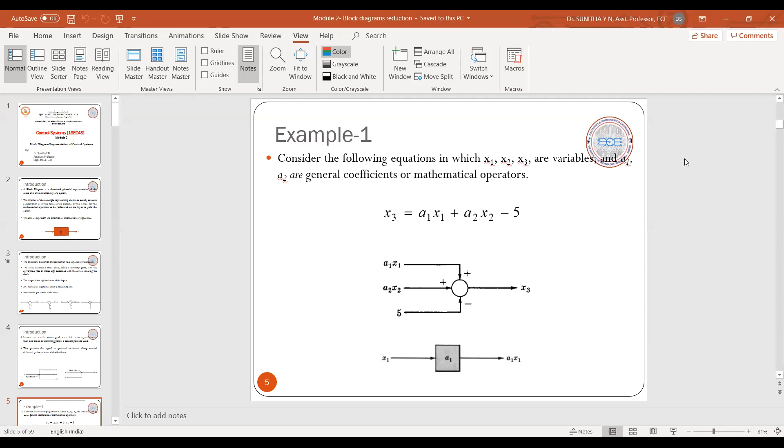Good morning, dear students. Let us start the second module, that is block diagram representation and signal flow graph. In this chapter, mainly we will be understanding how a control system is represented pictorially, and how a control system is represented graphically.

The block diagram is a pictorial representation of a control system, which will express a cause-effect relationship of a system. That means a system will take an input and the system gives an output. So a simplest block diagram looks something like this. A simple block diagram will be as simple as a block that takes one input and gives one output.

And inside this block, you can have the mathematical operation which we are supposed to perform on the input, or I can simply take the name of the block, or this block can represent a function, or this block can represent a process. So this is about the simplest block diagram representation of a control system.

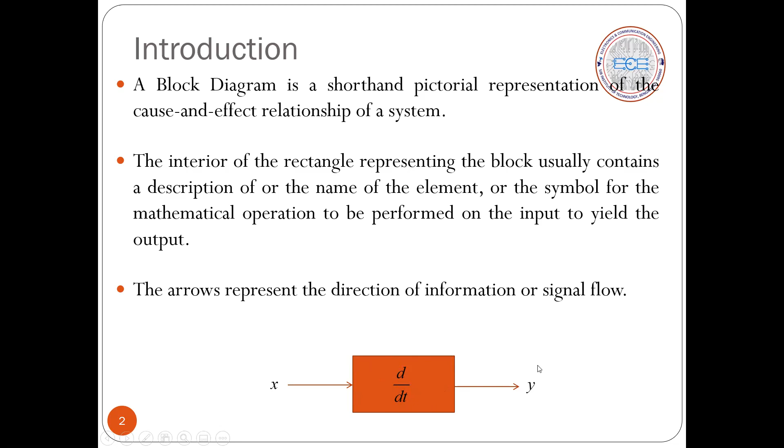Whenever we want to perform a signal subtraction or signal addition, we will be having a block which looks like a circle. We call it a summing point. Okay. And in the summing point, it takes the input, and we will use an arrow here just to say that the signal enters the summer or the signal leaves the summer. So just to express that incoming and outgoing pattern, we will be having arrows attached to the summer. The input arrow says that the signal enters the summer, the output arrow says the signal leaves the summer.

So the summer can take many inputs and gives one single output. So it is going to perform an algebraic sum. Why do we mention algebraic sum here? If you want to find the difference of two signals, you have to take the first signal with a plus sign, and if we take the second signal inside the summer with a negative sign, we can directly compute the difference of the two signals. So finally we can say that here we are computing the algebraic sum of the signals.

And here you can see that it can be represented in different ways. So here we have a summer. As I said, a summer is a block. Look, it is a block becoming a circle to represent a summer. And here you can see two inputs entering the summer and one signal coming out of the summer. The plus and plus of these inputs say that the output is the sum of these two signals, because both the inputs have a plus sign. That means here we are performing addition of the signals.

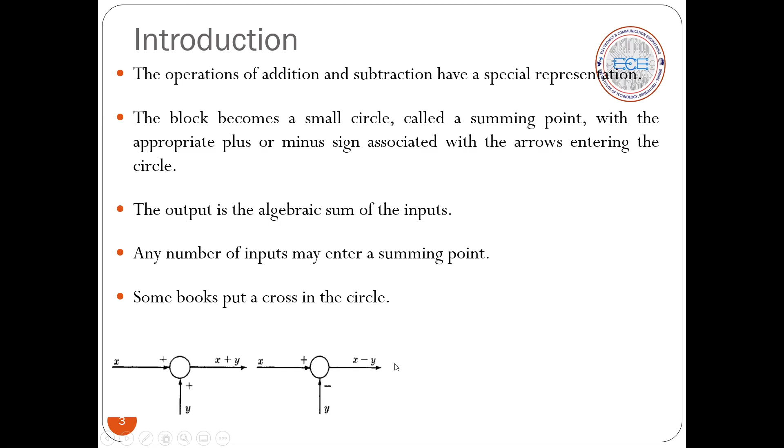Similarly, if you want to perform subtraction, the first signal enters the summer with the plus sign, and the second signal enters the summer with a negative sign. And what is the output here? The output is the difference of the two signals. Similarly, you can handle three inputs here, or actually you can handle n input signals using this summer, which gives as output the algebraic sum of the input signals. So this is the three input signal summer representation.

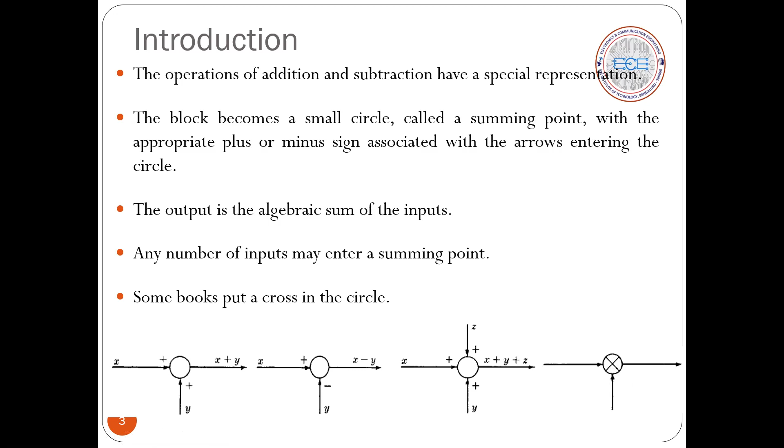And in a few literatures, you will find that a circle with an X mark represents the summer. So conventionally, I'll be using this as a summer, because in a few literatures this is the symbolic summer representation. Okay. So this is about a summer.

And in some situations, we will find that we may have to pass the same signal to different parts of the block diagram or different parts of the system. So how can we do that? The same signal has to branch to different points. Okay. So here the entire signal is going here as a copy, and again the same copy going here, and again the same copy going here. The signal strength is the same; the same signal is going to three different points, and this junction point we call a takeoff point.

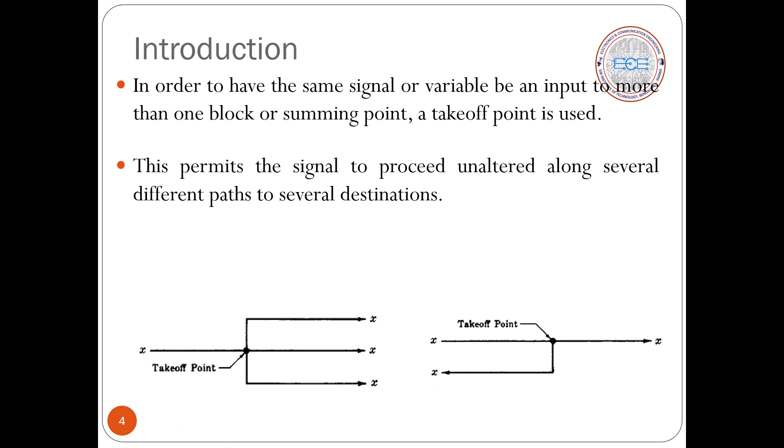We are taking a copy of the signal to some other point here, and again the same signal is going to some other point. This is what we call a takeoff point. So here also, we have a takeoff point representation. We have a signal X in this line. You are taking a copy of that X and you are moving it to some other point of the block diagram. So this is what we call the takeoff point in a block diagram.

Okay, so I have an example here. So we have a mathematical equation here. So what does this mathematical equation say? This mathematical equation says that we have in total two input variables, x1 and x2, and we have one output variable, x3. So now x3, the output variable, is the sum of these input variables in this particular fashion.

That is a1, which is a constant, into the first variable x1, plus a2, the second constant, with the input x2, and we have minus a constant 5. So how can we represent this in a block diagram fashion, or pictorial representation of this mathematical equation? How to do it? Let's understand.

So since we are performing a signal operation here, we will be using a summer, which performs the arithmetic operation on the signal, correct? We are performing arithmetic operation on the signal, so we will be using this summer, as we discussed in the previous slide. So we have a summer representation, and how many inputs does it take? You can see here we have three different terms. So we have three inputs to the summer and one output, and that output is x3.

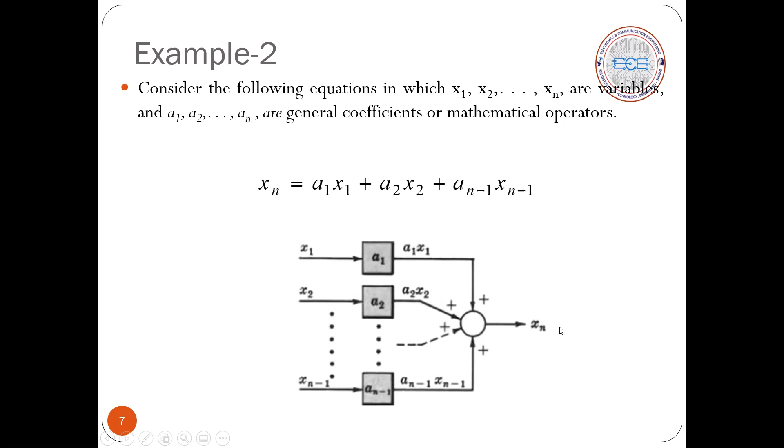Okay, so similarly I can extend this to n terms. A summer can take n number of inputs and give one single output. That is what we call the algebraic sum of all the n inputs which we feed to the summer. You can see here x1, x2, like that, xn minus 1. So that many inputs I can feed to the summer, and based on the sign here, we perform the summation. So we call that an algebraic summation of signals happening inside the summer.

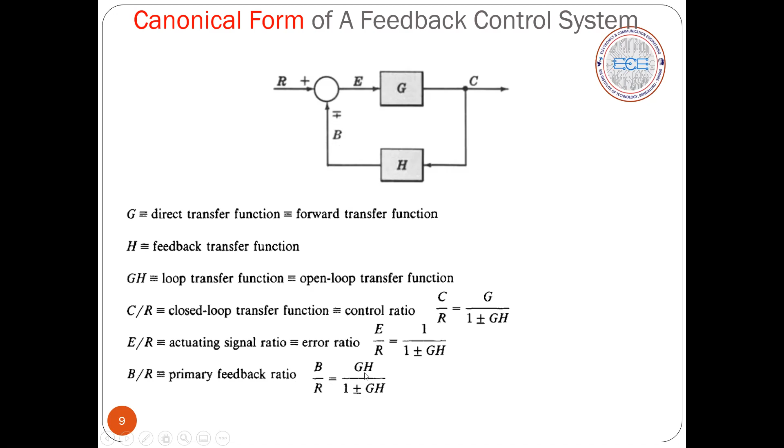Okay, so B by R is a primary feedback ratio, that is the feedback signal to the input signal R. That ratio, if I compute, we call it a primary feedback ratio, B by R, which is equal to G into H divided by 1 plus or minus G into H.

Characteristic equation. The control ratio is the closed loop transfer function of the system, as we have seen. The control ratio is the final transfer function of the system, that is C(s)/R(s) = G(s) / (1 ± G(s)H(s)). The denominator of this transfer function is the characteristic equation.

Why do we call this a characteristic equation? Because this gives us the poles of the system. Poles are the points at which the system gains a very high value. That is what's important. Whereas the numerator will be having zeros. That means the roots of this numerator polynomial will be carrying zeros, so the transfer function will be getting a value 0 at those points. So we don't consider that.

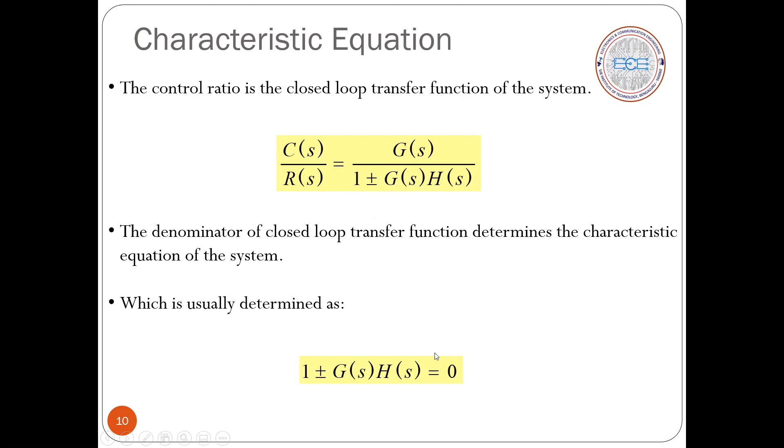The denominator polynomial is the characteristic equation, which gives the complete behavior of the control system. That's why we call it a characteristic equation. So 1 + G(s)H(s) is what we call the characteristic equation of a transfer function. So we have here an example. This is the canonical block diagram representation of a feedback control system.

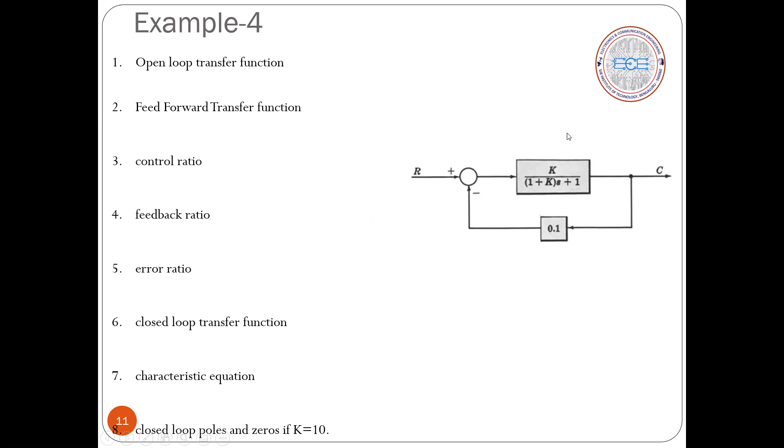Here you have a forward path, and here you have a feedback path. I will call this block G(s), and this block H(s). Input enters here, here we get the error signal, and this is the controlled output C. How to compute the open loop transfer function? Open loop transfer function is feedback divided by error signal, which we have already seen in the previous slide, is G(s)H(s).

What is the feed forward transfer function? It is output divided by the error signal E(s), which is equal to G(s). This is the forward transfer function. What is the control ratio? It is output by input, given by G(s) / (1 + G(s)H(s)). We have seen that in the last slide; you have to substitute G(s) and H(s) and simplify.

Feedback ratio is B(s)/R(s), the expression we have seen. Error ratio, E(s)/R(s), is equal to 1 / (1 + G(s)H(s)), because I have minus here, so I have plus here. Closed loop transfer function, that is control ratio, output divided by input, is G(s) / (1 + G(s)H(s)). The closed loop transfer function and control ratio equations are the same. So the characteristic equation is the denominator of the closed loop transfer function: 1 + G(s)H(s) = 0.

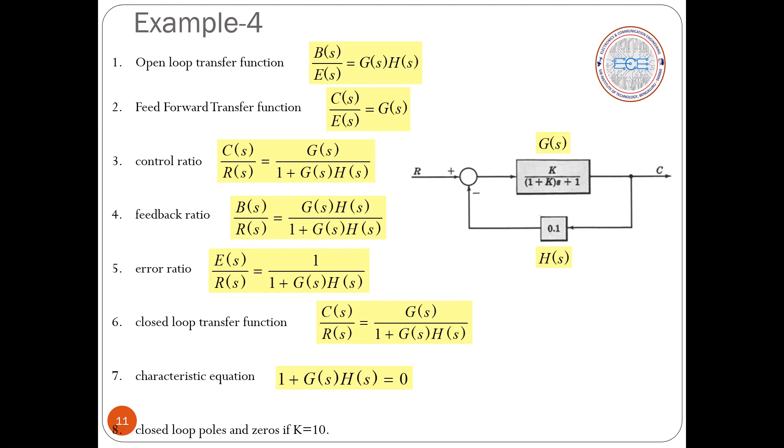Take the closed loop transfer function, and you will get a numerator polynomial and a denominator polynomial. Find the roots of those polynomials: the number of roots in the numerator gives the number of zeros, and the number of roots in the denominator gives the number of poles. Substitute K = 10 and calculate the zeros and poles. That's homework. Please do it.

Now, you will not always find a control system represented in a single block or with very few blocks. It is actually a huge, complex system. You will find many blocks interconnected, functional cross connections, lots of feedback loops, and several loops existing in a block diagram. So we have to have a systematic approach to simplify them.

Okay, and we have to reduce that to a canonical form. That is a standard form of representing a control system, wherein you will be having a very simple, very clear forward path, and a very clear feedback path, so that we can analyze the system and computing a transfer function will be easy. Okay, so we have to try to bring the given complex block diagram into a simple canonical form.

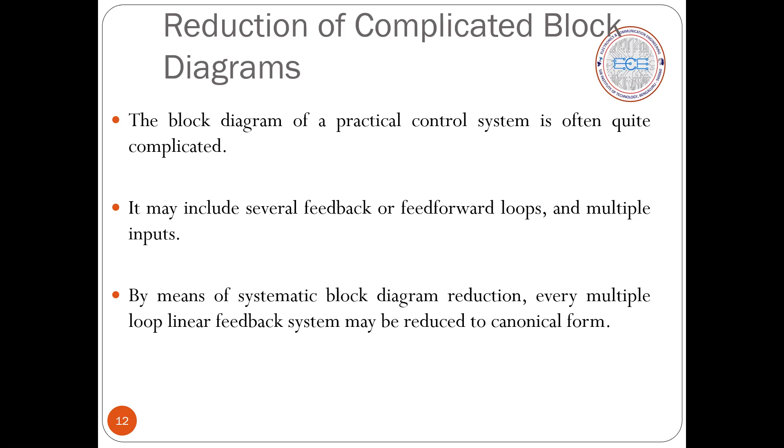So for that, we have to use some techniques so that we can simplify or reduce the given block diagram. So first, I will see the different techniques which we have, so that we can use them to simplify the block diagram. First one is the cascading form. Cascade, that is, if you find different blocks connected in series like this, we call it cascading. This pattern is called a cascading connection. So that time you can just directly multiply the gain and you can have one single block.

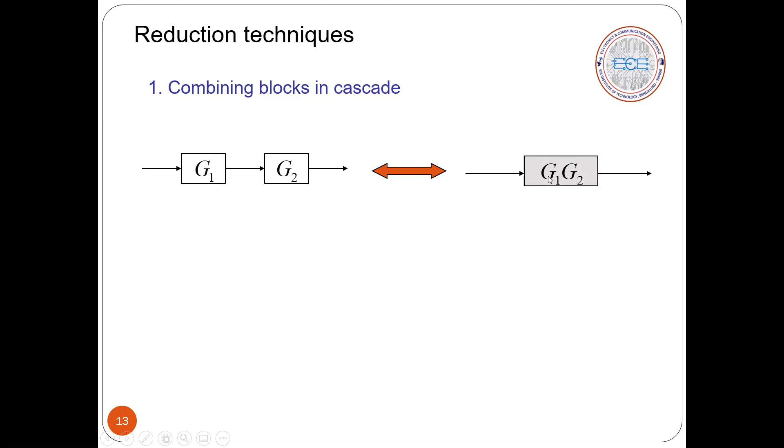Okay, so this is what we call a cascading of blocks. This is one reduction technique. So if you find blocks next to each other like this, with no disturbance, we call it a standard cascade pattern. So you can remove these two blocks and have one single equivalent block, and the content or functionality of the block is the product of these two block gains.

Okay, so next is combining parallel blocks. The next technique is parallel blocks simplification. Here you observe the same signal through G1 entering the summer, and the same signal through G2 entering the summer. The direction is the same, so we call these two parallel lines. Lines originating from the same point and meeting at the same point, we call them parallel lines.

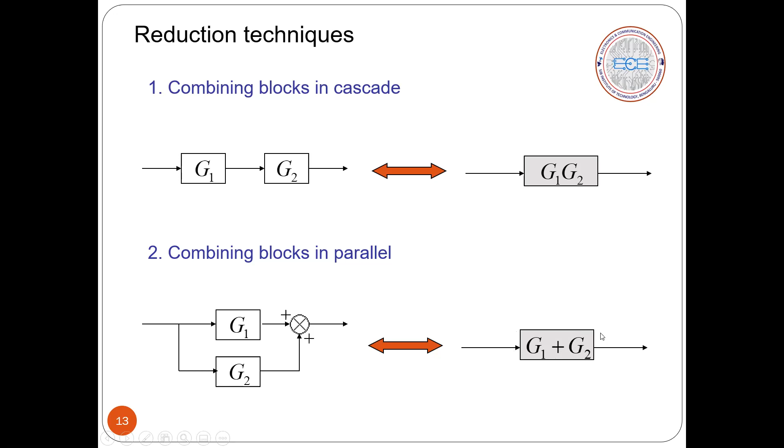Those parallel lines we can simplify. How? You can directly add these two. You can eliminate the summer and have one single block whose value will be the sum of these two blocks. So this is the second reduction technique, that is, combination of parallel blocks.

Okay, so the next reduction technique is that I can move the summer ahead of a block or behind a block. I can take this summer ahead of this block, or if it is present here originally, I can take it back. Why do I do that? Sometimes it is required so as to simplify the block diagram. So here we have the summer moved behind the block. The summer, which was present left of the block G, has now come to the right of G.

So now if you are moving the summer to the right, what is actually happening? Initially the output of the summer will not be having G. Now we will be getting G, correct? If I move it here, we'll be getting G. So I am taking the summer ahead of G, and this G is now getting added and appears at the output point. So I'll take a signal passing through G and enter it here. That means the unnecessary G which is getting added, I am going to cancel it.

You can see the minus. I'm going to cancel it. So I have to have one block G here. This is an additional block because of shifting the summer to the right of the block, so as to cancel this G signal which is getting added, and you will find the signal here is the same as the signal we had before. Okay, next, moving a summer point ahead of a block.

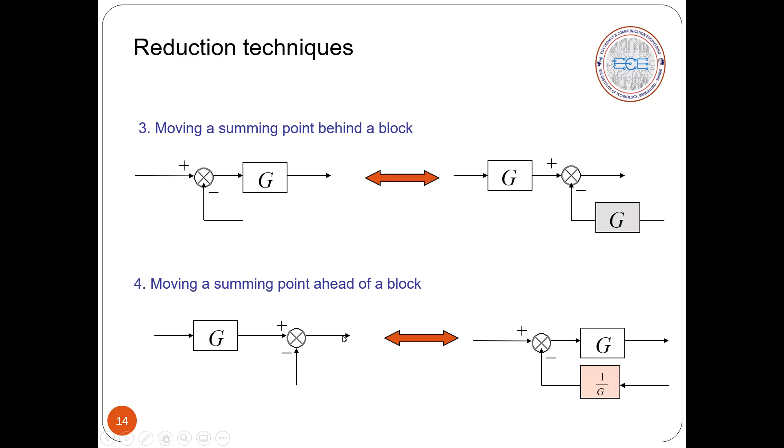So that G we are trying to cancel here. If you take 1 by G, multiplied by G happening here, it will get cancelled. So you will get whatever signal you were getting.

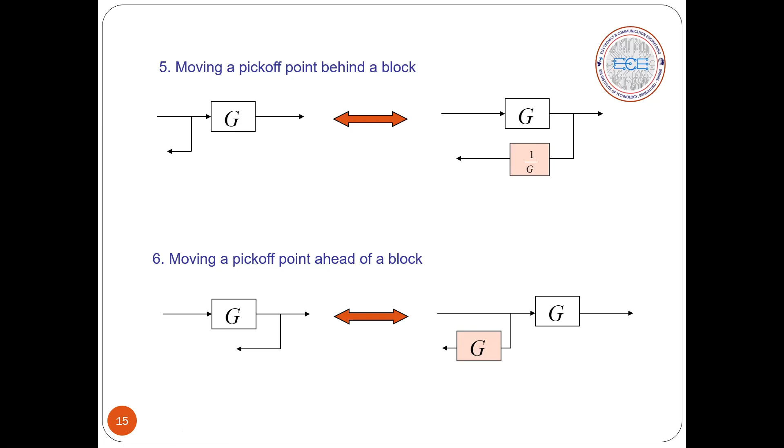So while taking it ahead of the block, what will happen? If I branch here, I get the effect of G, correct? Whereas if I go here, I'll be missing the effect of G. So if I'm coming ahead of the block, I will miss this G. That G I have to have here by having a separate block G. So this is what we call moving a takeoff point ahead of a block.

Next is eliminating a feedback loop. You can see that this is already a standard canonical form. You can reduce this to one single block: G, the forward path gain, divided by 1 minus or plus G into H, based on the sign we have here. That means if you have plus here, you get minus here. If you have minus here, you will get plus here.

So similarly, if you are having unity feedback, that is, if the H value is 1, you will find that this block becomes G divided by 1 minus or plus G. Very simple. This is what we call the elimination of feedback loop technique.

Next we have the neighboring summer swapping technique. You can swap summers which are next to each other. So how can we do it? It is very simple. We have signal A entering here, and to this summer we have signal B entering, correct? What I can do is make B enter here and make A enter here.

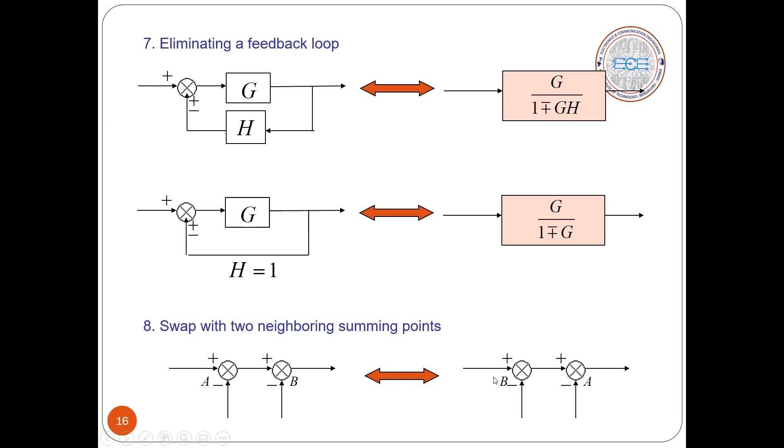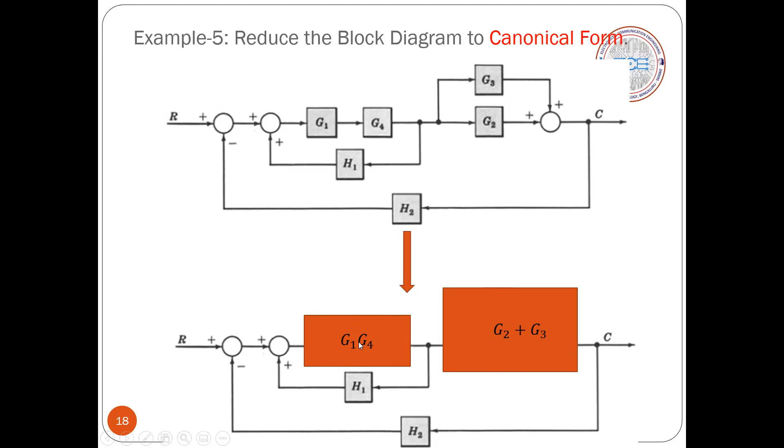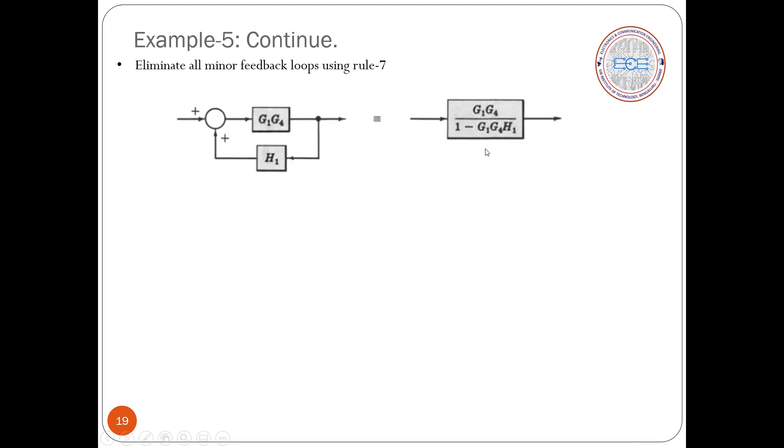Next, how to proceed with further simplification. Here we have one canonical form pattern, a feedback path. It is not a negative feedback path; see, this is plus, right? So we have a positive feedback path, and we simplify it according to the formula we learned, rule number 7. Since it is positive feedback, we get a negative sign here. We have done it here, so this is the equivalent block.

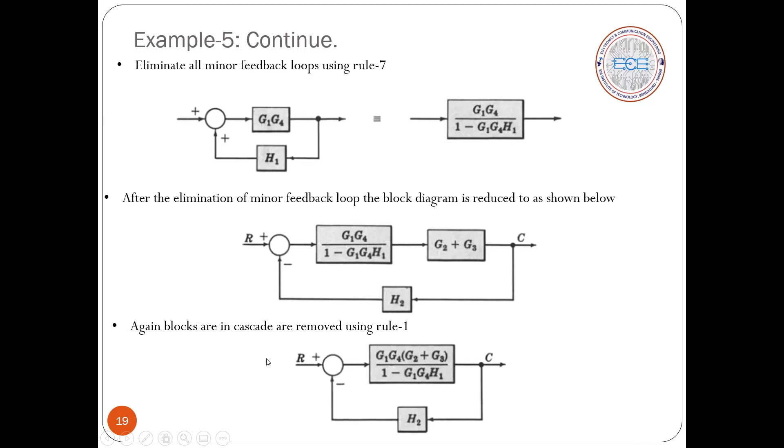That replacement of the simplified block is done, and these two are found to be in cascade, so we simplify and have one single block and one feedback path. We call it the standard canonical form, and using rule number 7 again, you can simplify that to get one single block.